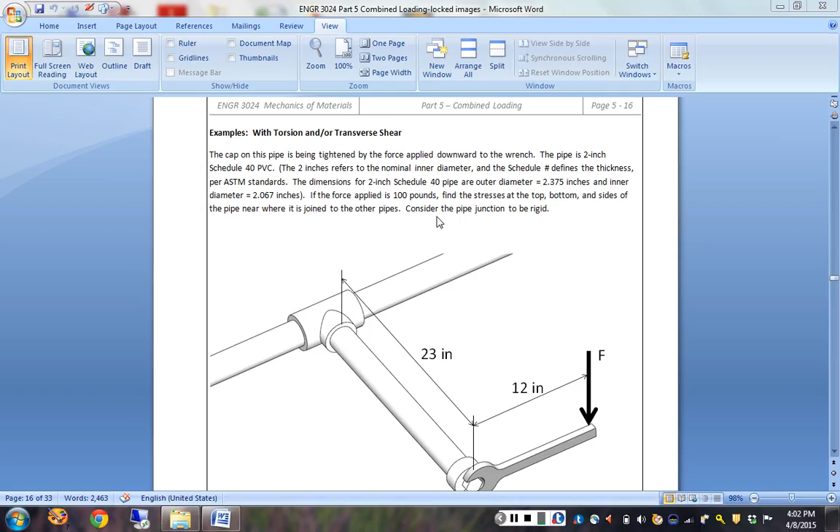And we're going to first, always, what's the first part of the process? It's a free body diagram, or we've done this enough that maybe we can kind of fast forward, but the first part really is always doing the statics problem and figuring out the reactions. Because you have to know the reactions internal to it to know what kind of stresses and what the stress magnitudes are. So, we've got some details.

We've got the cap on the pipe is being tightened by a force that's going downward on the wrench. The pipe is 2-inch PVC, which is a nominal, which actually means that it's this 2.375. Let's be purple today. So outer diameter of blah, inner diameter of blah, and it's 100 pounds down on this PVC.

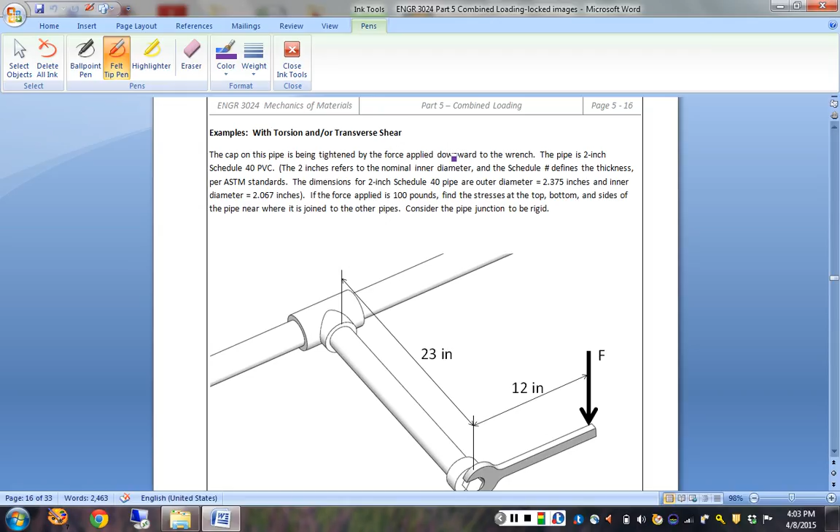Which I have always thought, gee, that's going to pop that PVC. 100 pounds is a lot for some PVC. But lest I digress.

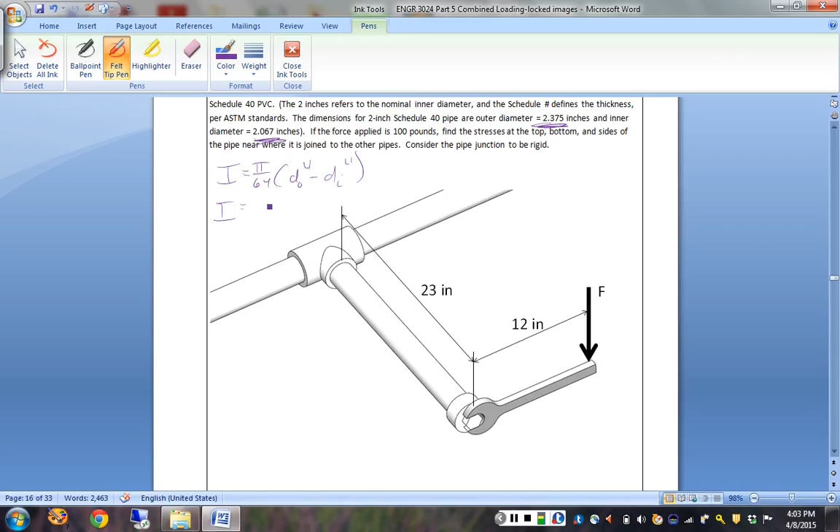So we know we're going to need some area properties with this. We are given OD and ID, and so we know we're going to be doing stresses. We know we're going to need a moment of inertia. This is one of the things that's provided on the exam, but we know that that guy is an outer minus an inner, and that's going to be 0.6657. And we have, what all is going on?

We have one force. What kind of loading does this create in this structure? What all do we have going on? Yeah, shear, because it's a straight linear force. There is a torque, which means there's what kind? It's a torsional load. So we got that. We got torsional load. We got a shear load. And that's also going to translate into bending. So we got all sorts of stuff going on just from that one force.

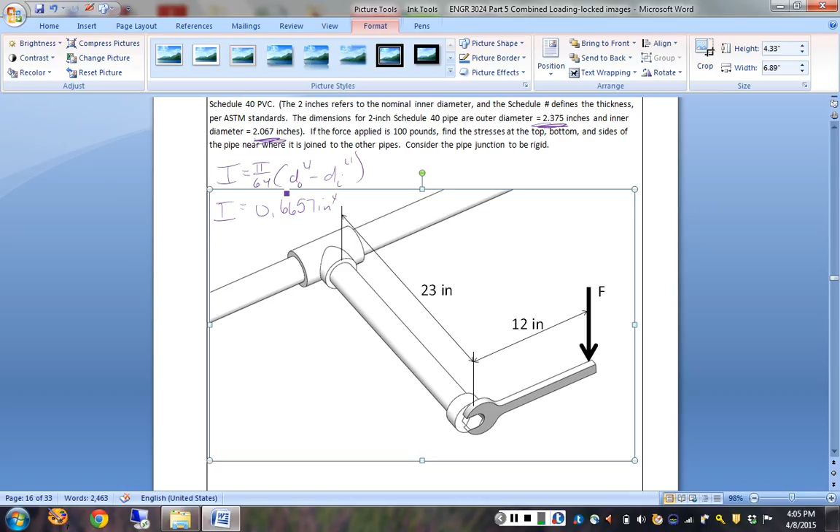So if we've got bending, we know we're going to have normal stress due to that bending moment. If we have torsion, we know we're going to have what kind of stress? Yeah, that kind. Doorknob stress? It's shear, though. Shear stress. Yeah, if you've got a torsional load. Shear, it's this shear. Right, true, exactly. It's not this shear, it's this shear, yes. But we have this vertical, so we are also going to have regular shear this way as well because of the shear linear force. So we got a lot going on.

If we look at this as if we've taken a hacksaw and we've chopped it off up here at the base connection, because this is essentially a cantilever, and you know that the worst case is going to be back at the connection point at the cantilever. So this is where I'm taking my section cut, and I'm now looking at it like that. I've taken the beam away, and I'm looking at that face at that connection point.

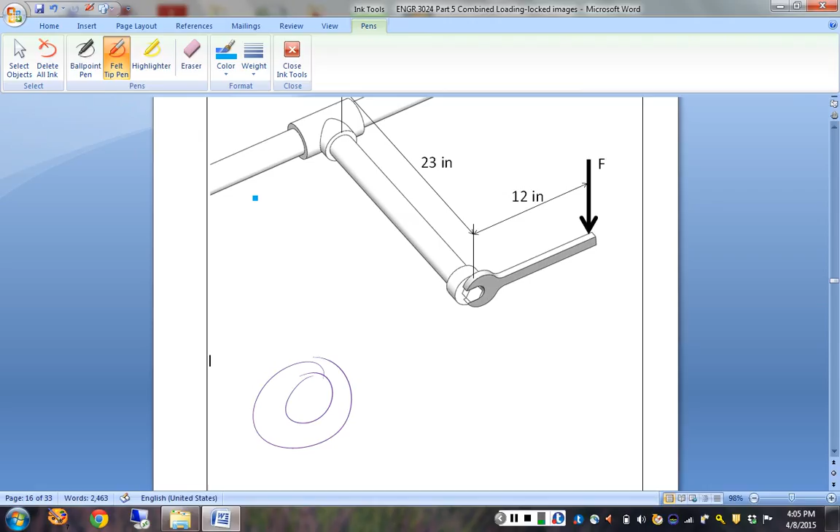So I know that I am going to have, I'll change color. I know that I have that shear force V, and that's downward, as a stress resultant back at the connection point. We also established that we're going to have bending moment downward, and that's about the axis of this other pipe. Okay? And so I can draw that one like this as a double arrow, and that's a downward. So that's my bending moment.

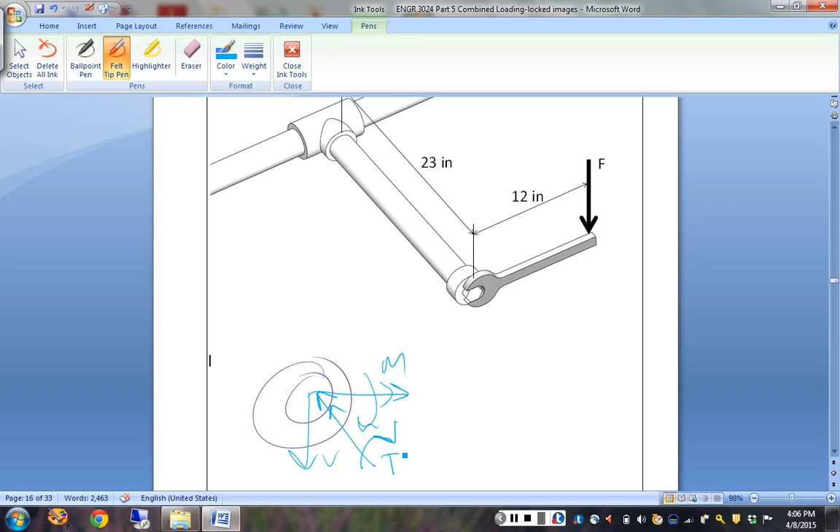And then what else do I have? What's that last one? It's a twist. It's the torsion, and that wrench is going this way. So it's a torque about this axis into the page. And I can draw that guy like that. And it's this way. And that's my torque. All right, now what are the magnitudes of those? I'm going to start with the shear because that one's easy.

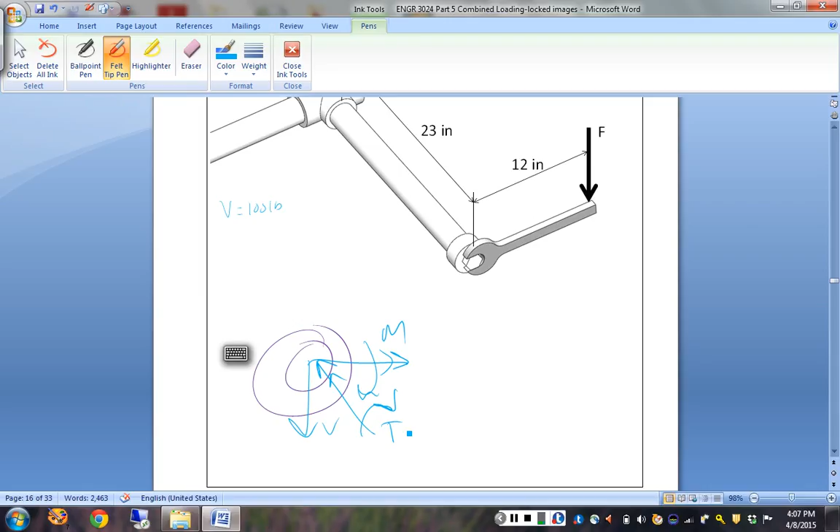It's just 100 pounds. So this guy, and I'll go over here, V equals 100 pounds. Okay, how about the magnitude of my twist? What's the moment arm for the twisting? That's the 12-inch moment arm. So how big is that torsional moment? Is 100 pounds times my 12 inches, so 1,200 inch-pounds.

And what about my bending moment? That's the 23-inch moment arm. It's the 100-pound force, but the 23-inch moment arm, so we got 2,300 inch-pounds. So those are my stress resultants back at the connection point. But we don't really care about stress resultants or the reactions.

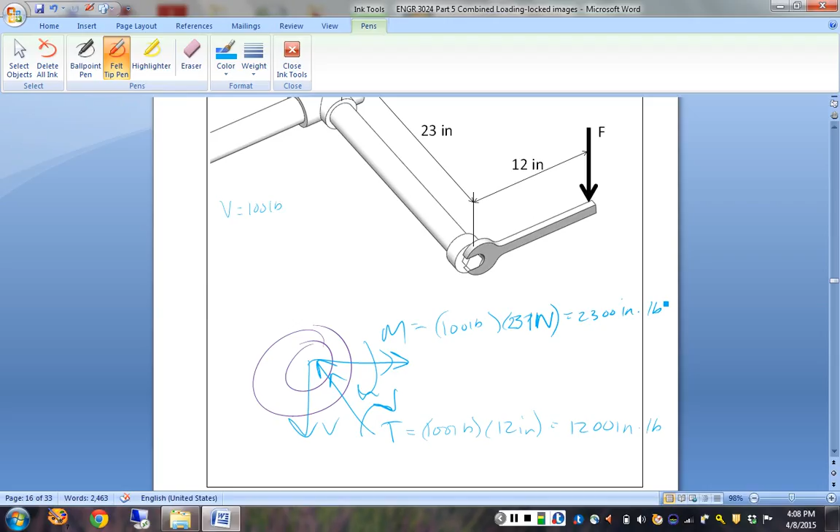We care about stresses. So if we have these things going on in a structure, what kind of stresses do they make? So let's start with bending. We got a bending moment. How do we get a stress? It's going to be negative MC over I. Yeah. We want the max case. This is symmetric, so we can just say that our max is plus or minus MC over I.

All right? What's my C? Where's my neutral axis? It's symmetric, so my neutral axis is across the middle. So C is just half the outer diameter. Okay? So we know our bending moment is 2,300. We know our C is half the outer diameter. That outer diameter was 2.375, and we'll take half of that. And that moment of inertia we figured out a second ago was 0.6657 inches to the fourth. So this guy is plus or minus 4,103 psi.

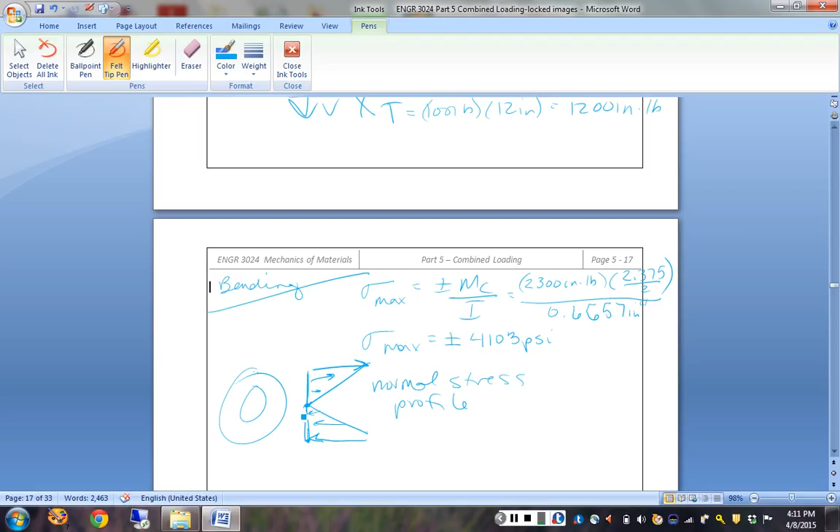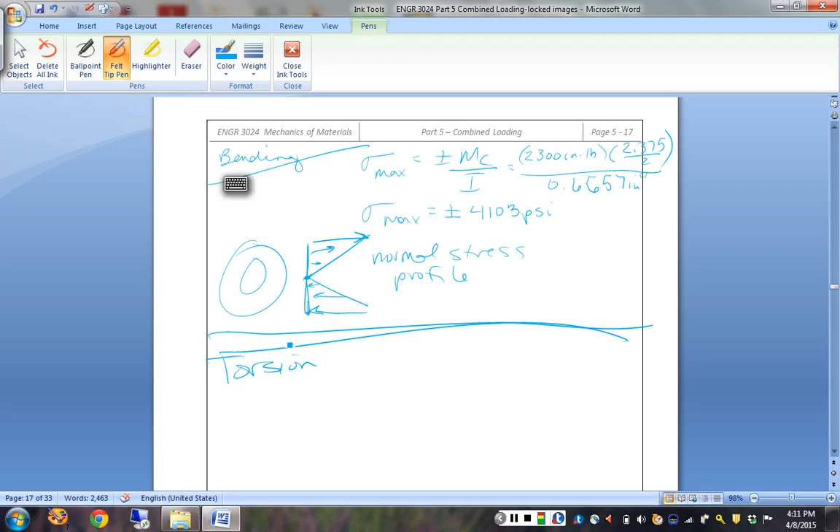We got torsion. What kind of stress, Mr. Beasley? If I twist on something, what do I get? Mm-hmm. How do I figure it out? That's the one. Okay, we figured out our I a second ago. A handy-dandy piece of trivia that I don't expect you to memorize is that J's are actually half of I's, or it's given on the back page of the test. It's pi over 32 times outer diameter to the fourth minus inner diameter to the fourth. Or 2 times I. Did I say half? It's 2 times, not half.

But what's my torque? My torque was 1,200 inch-pounds. What's my C? It's the same. It's a different quantity in that we're talking about just the distance from the center to any point on the outside because it's round, but it's the same value. So 2.375 over 2, and J is twice that, 1.3315 inches to the fourth, and that ends up being 1070 psi.

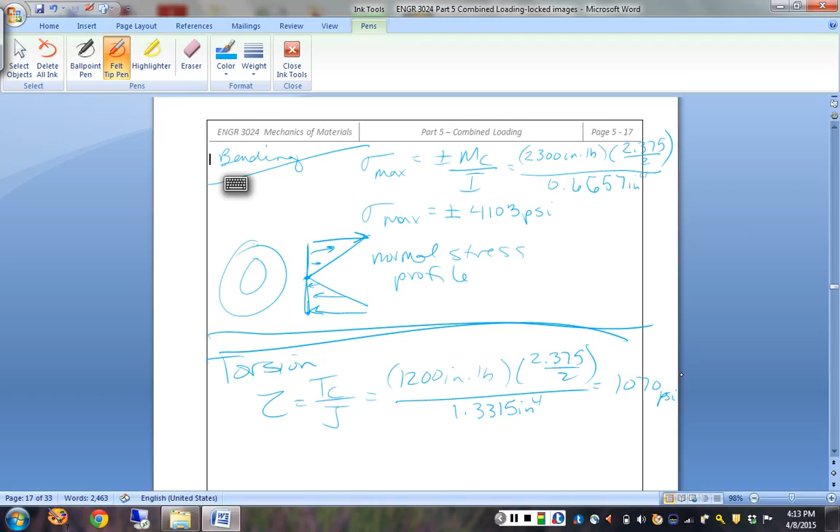All right, so what's going on all over the cross section here? Now this is on this face. The normal stress, if I take my section away, is either pointed at you or pointed into this surface. But when I twist on it, it's shear, and it's parallel to that surface. So what's my direction? How do I draw it? It's the same direction everywhere. It's just clockwise. Right. Normal stress, sigma; shear stress along the face.

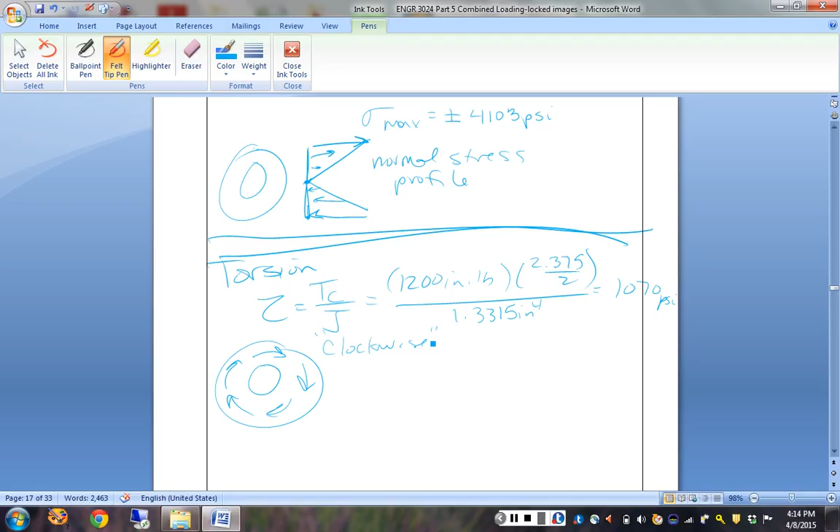So what would I say in an orthogonal sense, if I put it on a kind of global coordinate system, what's going on at noon? I've got 1070 in the plus I direction, or in the that-away direction. What do I have at 3 o'clock? 1070 down, 1070 this way, 1070 up. So you can think about it in a tangent to the circle sense. Make sense? All right. What else we got going on? Ooh, this one gets a little messy.

It's the linear shear, or we'll call it the transverse shear. It's from the V. How do we get that stress? VQ over IT. So that causes shear stress. We get it from VQ over IT. And this one is a little tricky geometrically. I don't know, I kind of like it because it makes you think about it in just a slightly different way.

Let's go back up to. Do I have another? No, I don't. Okay, I'm going to put in some more space. Insert page. Need lots of space. All right.

So if I have my whole cross-section, if I have a shear force V, where is my worst case shear stress because of it? The center, right? It's at the center. It's quadratic and it's at the neutral axis. So I know that my worst case is here along the neutral axis. How much is it at noon? 0. How much is it at 6 o'clock? 0. So I know my worst case is along this center line along the neutral axis.

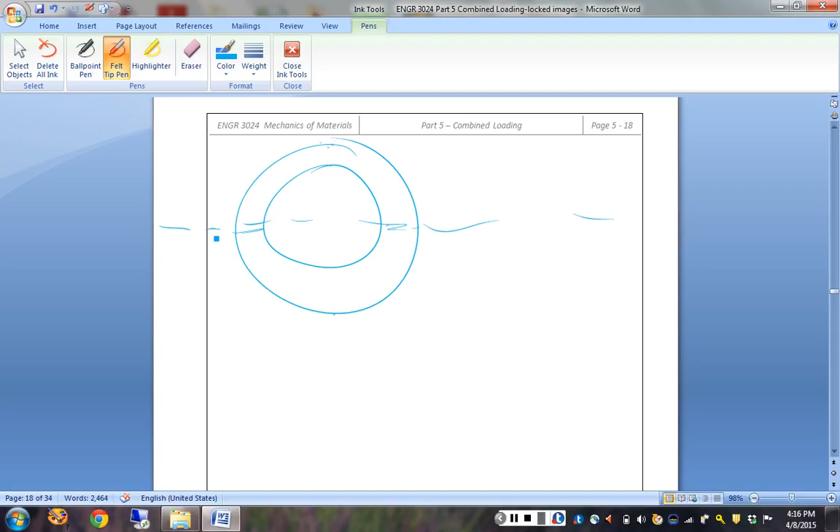Okay? Because I know that, I know where I want to make my virtual cut to do my Q calculation. It's as if you're taking a hacksaw and slicing it in half and you're shearing it at that neutral axis location. So we have tau equals VQ over IT, but we need our Q. Q is an area property like area, like moment of inertia. We can think about it in terms of the Q of the outside minus the Q of the stuff that's not there. So we can say that this is A prime y bar of the outside minus A prime y bar of the inner part.

If I just think about the areas, I need basically the area of a rainbow. And I can do that by area of a hemisphere minus area of a little hemisphere. Not a hemisphere, semicircle. We're not doing volumes. But you're with me, right? What's the area of a circle? Pi r squared, or pi over 4 diameter squared. So what's half of it? Pi over 8 OD squared and pi over 8 ID squared. Clever that. See, tricky ways to think of things.

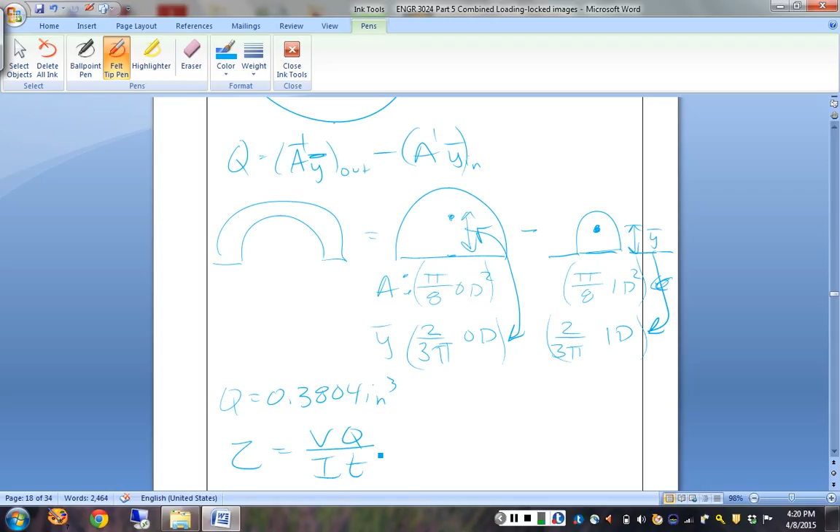Is y bar the centroid? Yes. Y bar is the centroid location of the solid shape, the centroid location of the little shape, but when you subtract this product from this product, you get the resultant Q. Q is the moment of area property that you need to go into VQ over IT. It's the thing that's sort of like area that goes into this formula. We got this guy, that's 100. We just went through all sorts of geometric gymnastics to get that guy.

To get a grasp of what Q actually is, is it like how much stuff is around the centroid? It is, I guess, in conjunction with the thickness, an indicator of the resistance to shear. Like mass is a resistance to motion. Moment of inertia I is resistance to bending. Moment of inertia J is resistance to twisting. That Q factor is an indicator of resistance to sideways shift.

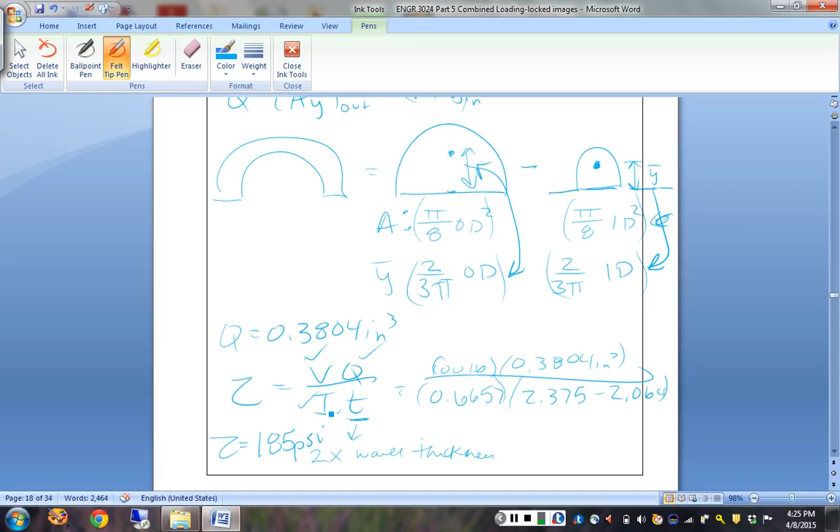Okay, I knew I was going to need lots of space. So now what does that guy look like in profile? Is that too microscopic to see? So we had clockwise for the other one. We've got compression at the bottom and tension at the top for that guy. What does this guy look like? We've already said it's 0 at the top and bottom. Tau equals 0. And it increases quadratically from here to the max here. And are they up? Are they down? Which way do they point? Do they point the same way?

Think about the shear force, the shear that we just know. Wouldn't they be going? Oh, do they go this way? It's parallel to this face, just like the torsional shear, but it's down everywhere.

Now, it is also into the plane because we are dealing with real three-dimensional stuff, and if you remember on our little cube of material, if you have a shear on one face, you have to have that corresponding shear on the other face to keep it in equilibrium, and we'll get to another drawing that maybe makes that make a little more sense shortly. But primarily, we have to think about it on this face, and it's down everywhere, and the max is at the neutral axis. So that is tau equals 185 psi in both of those locations.

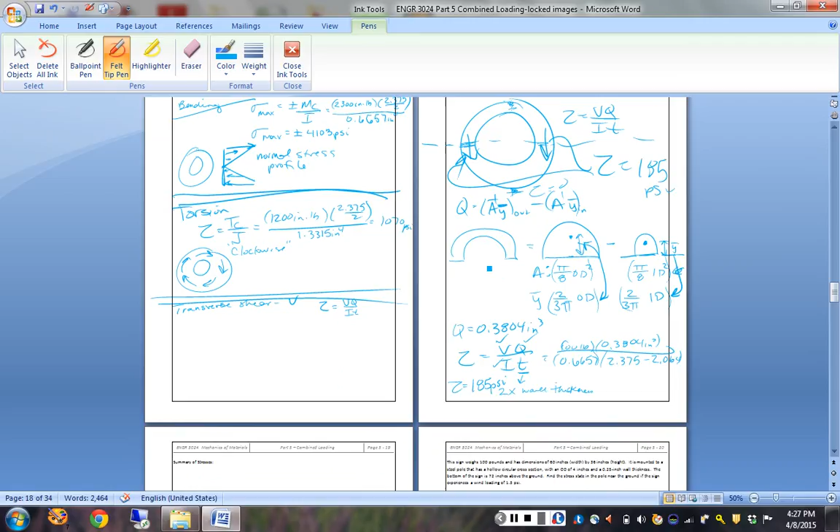Why would it be up? Like across the face. The reaction is upward, but the shear at the cut face is in the direction of the applied force. The reaction back at the pipe connection is up, but the shear force on the face is down. And it's at a maximum at the neutral axis.

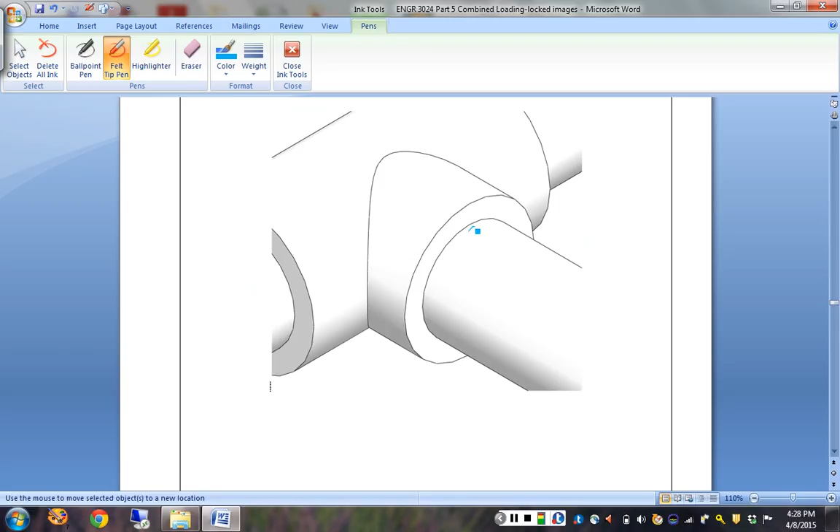Okay, so now this is a very zoomed in version of the same thing that you've got. And so essentially what I'm going to do now is summarize what's going on at 4 locations. I call it noon, 3 p.m. over there where you can't see it, 6 p.m. down there where you can't see it, and here. And I'm essentially going to take and blow up little chunks of material at each of these locations.

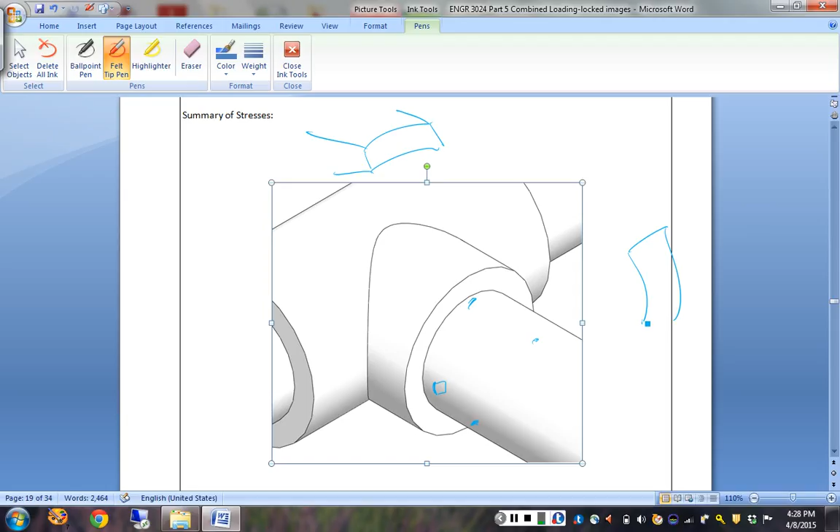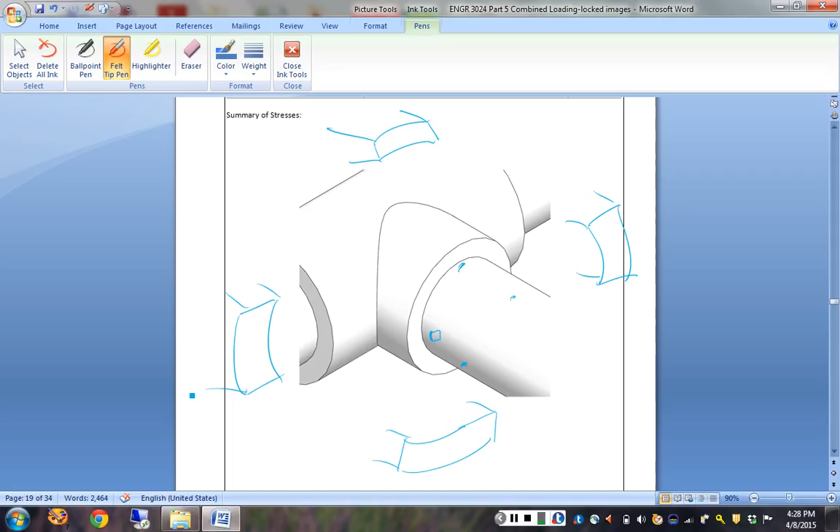And one over here looks like that. Okay, so again, that's pulling material, little squares of material out of each of these locations, and we're going to draw all of the stresses that are occurring at each of those locations, and we're going to start with bending stress, and I'm going to put the bending stress in purple.

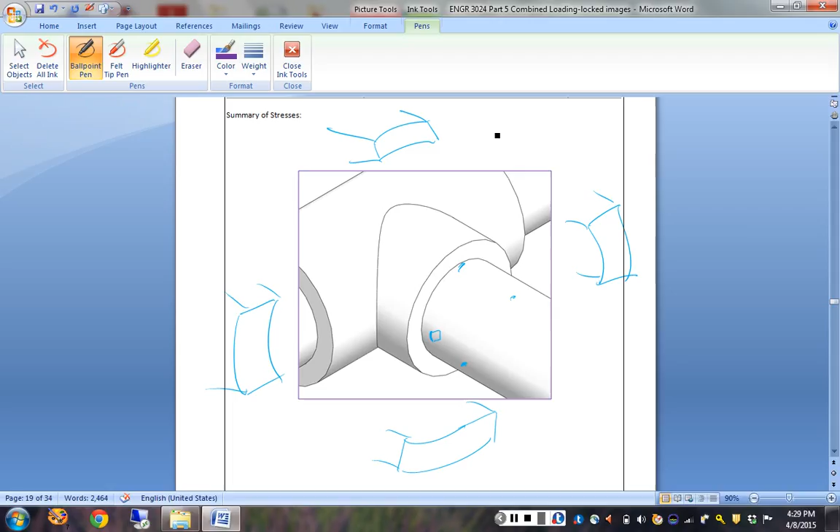In purple. Okay. If that is the surface that's flat to the wall, those arrows are going to come away from this. What do I have up here at noon? Tensile or compressive? Up at noon. Bending? Yep. We've got tensile, so it looks like that. How big was that? 4103. Okay. And that's our sigma.

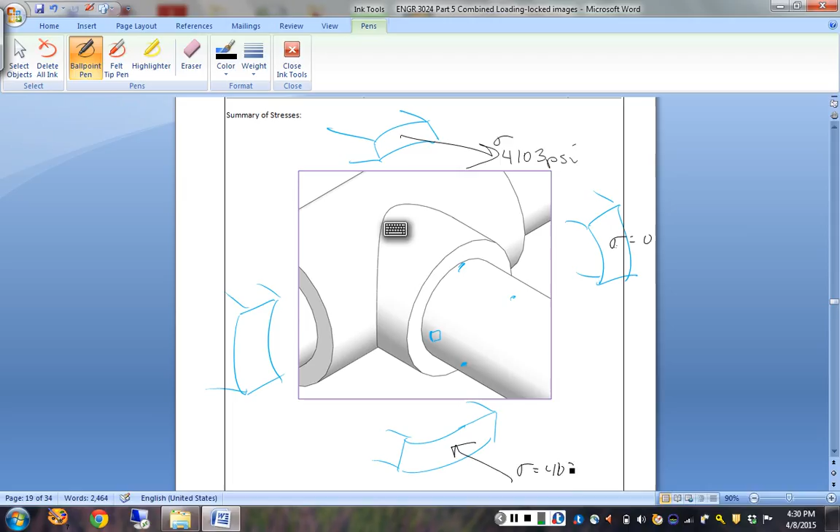How much sigma, Cassiola, do I have over here on this one? 0. Sigma equals 0. What do I got down here, Brogdon? Negative 4103. Yeah. Sigma equals negative 4103. And what do I have here, D'Agostino? Sigma equals 0. All right. Now I'm going to change color to happy blue for the torsional.

Okay. What do I have at noon for torsional? What's my value? It's 1070. And which way do I draw it? Yep, I go that way. So that is 1070 tau. But this is where also going into the other surface, you have to have that corresponding shear on the other face. Okay, how about over here? It's going to be down.

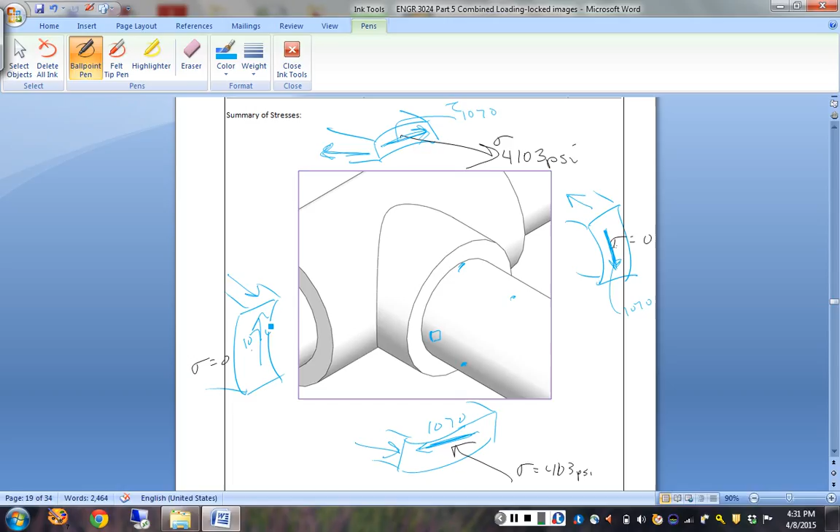6 o'clock? 1070 which way? Yeah. Oh, I forgot my other one going that way. And that. And this guy is 1070 up. Okay, who do I have left to account for? My linear shear. We'll go with green for that. How much is up here at noon? 0. So tau equals 0 for linear. How about at 6 o'clock?

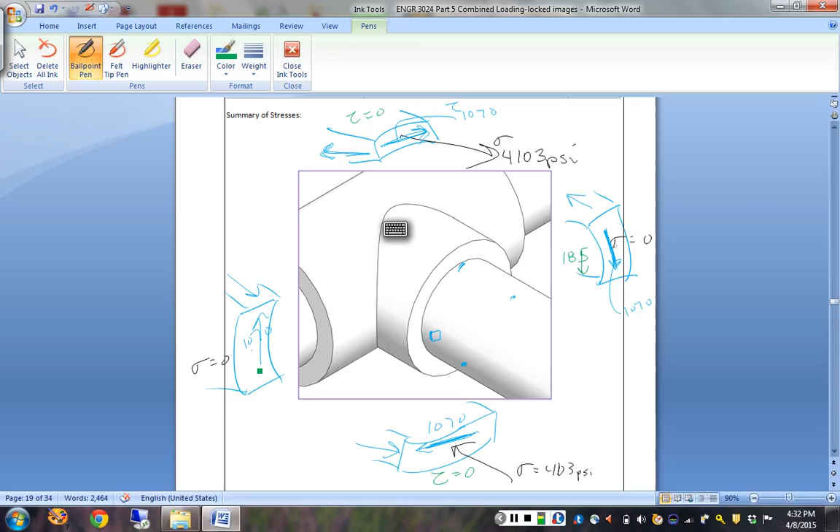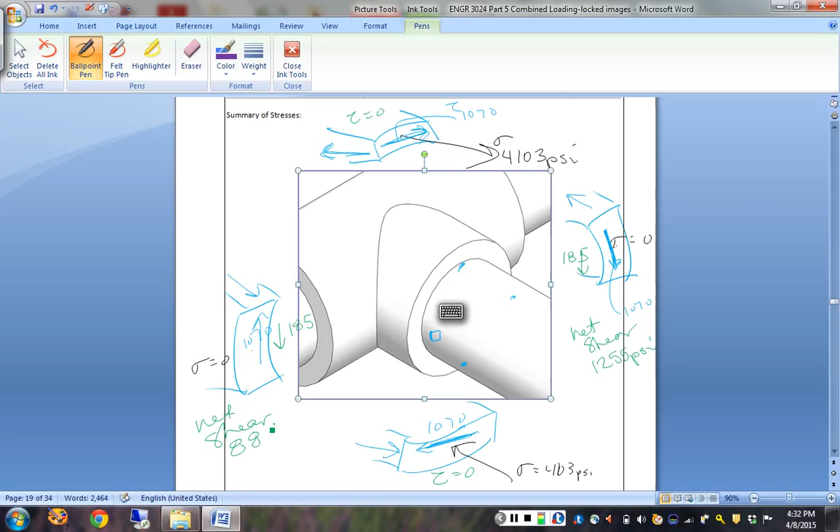All right, back here at 3 o'clock, 185 downward. And here on this other one, 185 down. So now, can I add 4103 and 1070? Absolutely not. Can I add 1070 and 185? Absolutely. So I have a net larger shear stress on this side. So net shear of 1255 over here, and a net shear of 885 over here. So my worst case stress state for shear is this one.

But what are these normal stresses? The normal stresses are 3.5 times bigger. So this is one reason that we can often ignore the contribution of a shear load, because the stress that you get from the bending moment ends up overshadowing things. Now, the next thing we're going to learn is how to account for when we have both, because we have a 1070 shear here and a 4103 normal, but we don't know how to account for that. But clearly, that has to be worse than if I had no shear and just the bending, because there's more than one thing going on. And that's the concept of principal stresses and stress transformation that we'll jump into. We may just get to start it today.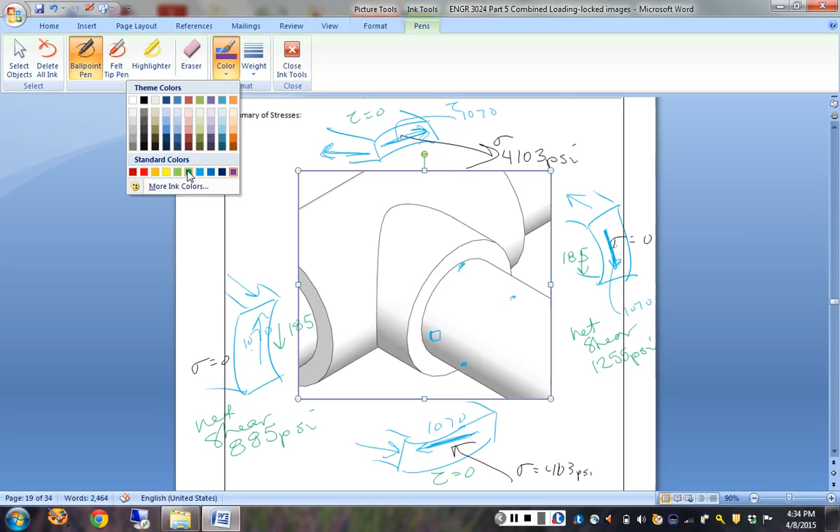So questions on that guy? Steve said that there's a corresponding shear, and that's only for torque? That you have the corresponding... on the other face? Yeah. No, I guess I should draw little green ones. Okay. Yeah, that was what I wanted to... Yes. So I was incomplete in that, yes, anytime you have a shear, you have the corresponding associated shears on the other faces. Yeah. All right.

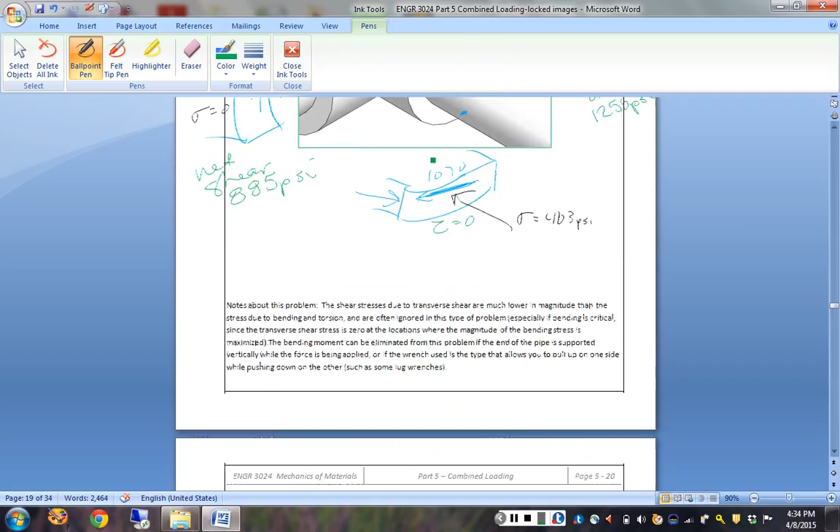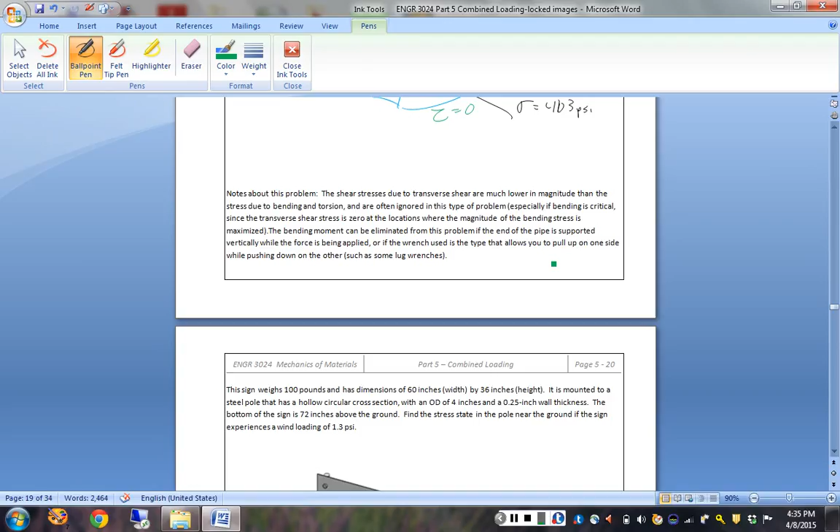ECU sign. Oh, I guess one of the notes, it is the text stuff that I often just kind of scroll past. It is useful to read that stuff. This is a note about like lug wrenches, and if you've got a single-sided wrench like that, it's putting way more load on it than if you have one of like tire irons that's like a plus. It doesn't give you that same bending load or the same stresses, because it's a couple as opposed to the unbalanced side offset force. So anyway, it's more safe for your pipe or your lug nut or whatever if you don't put the stress like that. Anyway, all right, a sign.

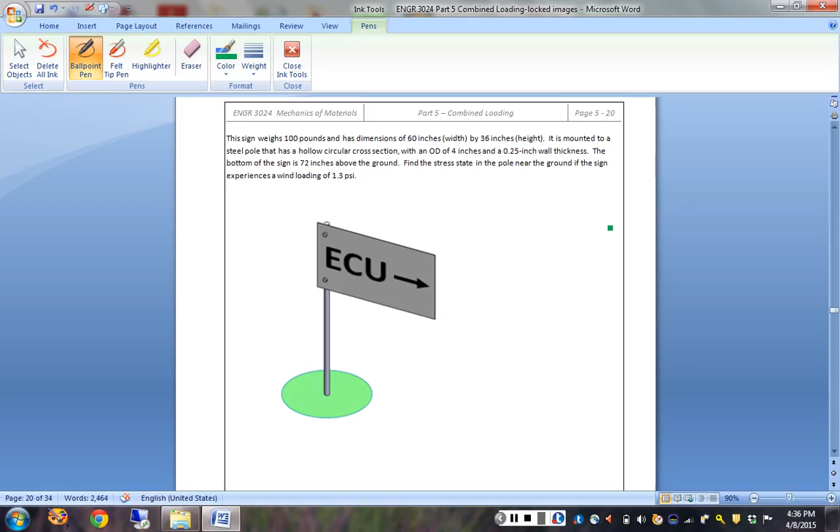We have a sign, and the sign itself weighs 100 pounds, and it's 60 inches by 36 inches, and it's on a pole. Pole is 4 inches with 1/4 inch wall thickness. This is 72 inches, and the wind is blowing at 1.3 psi. All right, what all do we need to do? I think one of the first things that we need to do is establish a coordinate system so that we know how to connect all of our math to this thing. So I'm going to say this way is X, and the wind is blowing in Y.

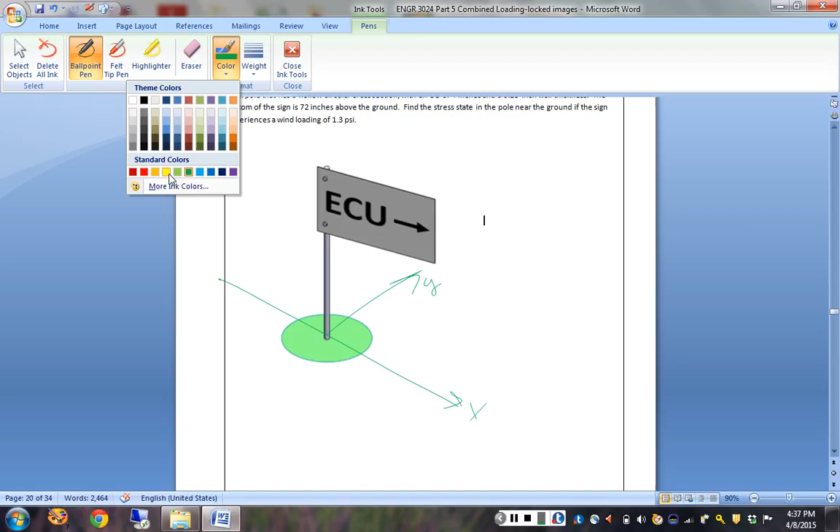Again, this is basically a cantilever beam situation where the worst case scenario is going to be at the connection point. So we need to figure out what all is going on with this situation. So I guess we'll start with, what are the forces that are going to be acting? I'll do forces in red because they're dangerous. What all's going on? The weight of the sign.

The weight of the thing, where does the weight of the thing act? Through the center of mass. We're going to assume that it's a homogeneous thing. So we have a force due to weight. And we've got the wind force. How do you convert a velocity into a force? Is it momentum? Like, what PSI would a 40-mile-an-hour wind give? Yeah, it's an ugly fluids problem, and I don't like fluids, so ask the internet.

But we already know this one is 1.3 psi. You guys know how to deal with a distributed linear load, right? 8 pounds per inch or something. Well, to do this statics problem, this is basically a planar distributed load, pounds per square inch. So we're going to do the statics problem by figuring out the resultant, multiplying by the area over which it acts to figure out the resultant force, which is also going to act through the center of mass. So this is force due to wind.

So my weight force, we are told, is 100. And my wind force is 1.3 psi times the area, and the area is 60 by 36. So 1.3 times 60 times 36 is 2808 pounds. All right. What all kind of reactions is this scenario going to make? Which way? Like that. Okay, what do we call that? Bending about Y. Okay, which force and which moment arm? Weight is the force, and what's the moment arm? Halfway. It's the location of the center of mass of the sign, so that's 30, right? So weight of the sign, and the moment arm is that far.

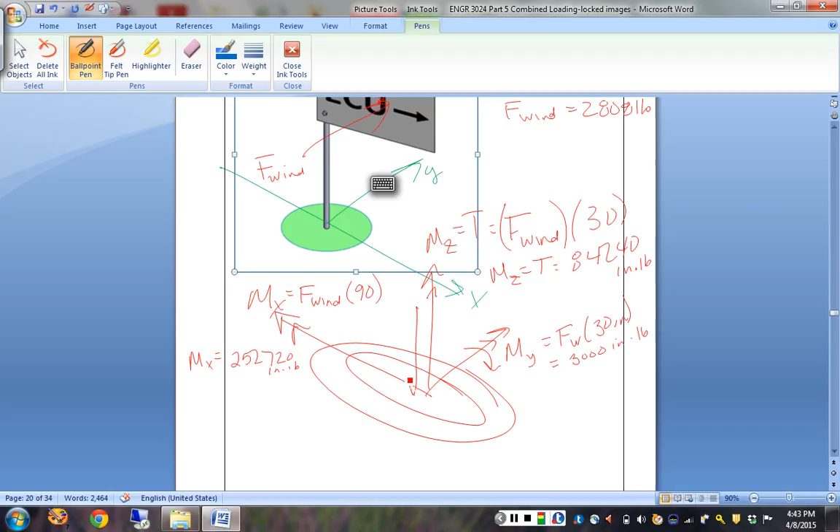Did I do the math wrong? 87? 72 plus 15? 18, okay. Yeah, it's 36 tall, not 30. So force of the wind times 90. So the moment about x is 252,720 inch-pounds. Is that it? That's 3 dimensions, but we ain't done yet. Let's go for some blue, because we have linear forces going on as well. Which way? Oh, that didn't change, bugger. Why does it do this to me? Okay, so its own weight is a linear compressive load. There are only 6 possible reactions, 3 moments and 3 linear. We got one more. What is it?

Yeah, it translates, it would want to shear off that way. So we got into static... whatever it is, indeterminate. No. So V equals the wind force, and the axial P equals the weight force. So that's everything that's going on. It is a lot. And I pity those of you who don't have multiple colors because that's just a whole lot going on. Okay.

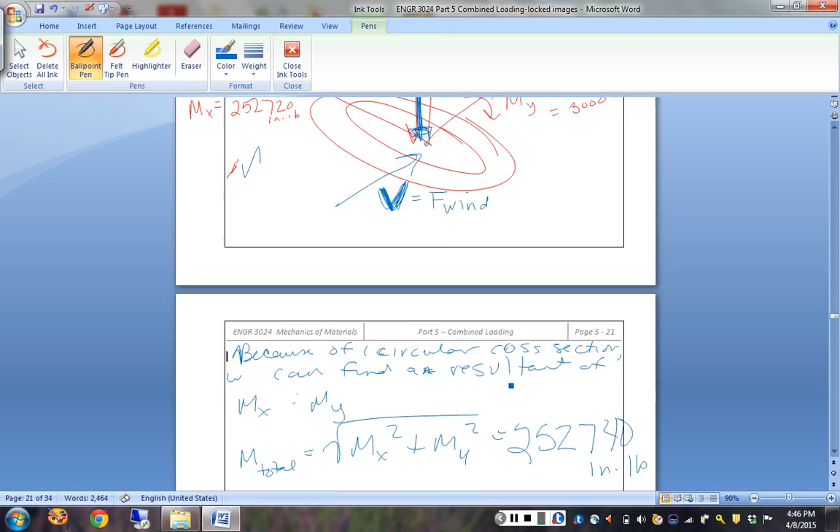So because of circular cross section, we can find a resultant of Mx and My. So M total is just the Pythagorean sum, and that ends up being 252,740 inch pounds. Did I already write that number? I wrote that number. We're good.

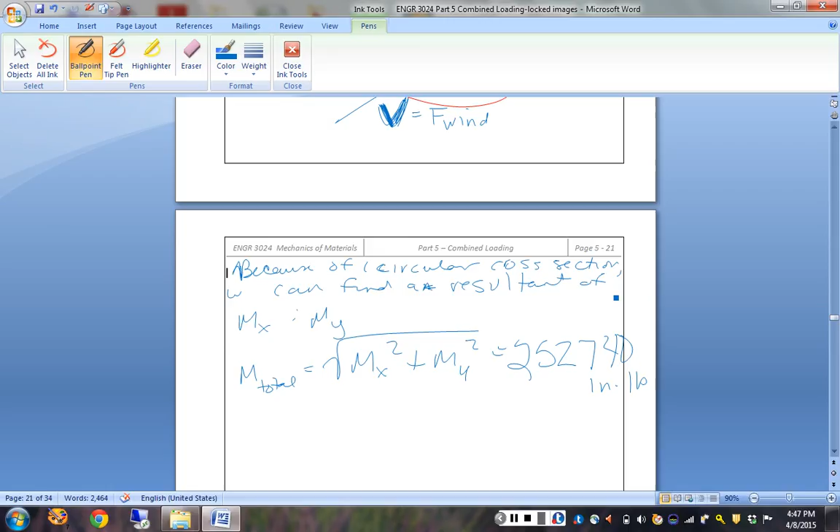Now, how is it that that works? How is it that we don't care about the direction? I'm about to explain that because of the various magnitudes. How big is this shear force? V wind, or the F wind, is how big? 2808. And how big is the axial force? This guy's only 100. Those are trivial in comparison to these other things that we've got going on. You can analyze them, you can do the math, but their contribution is going to be orders of magnitude smaller, so we can just throw it away.

If the numbers aren't small in comparison, you may not be able to, but the other thing is, no matter what, where is the maximum shear value due to the linear shear force? It's always at the neutral axis. So it's always where the normal stress is at 0. So your worst case normal stress is where you have no shear, and your worst case shear stress is where you have no normal stress. So if your normal stress magnitude is bigger, you know the shear stress is never going to be your worst case scenario. So to say that in a different way, the stress tau due to V is also ignored because it is where sigma bend equals 0.

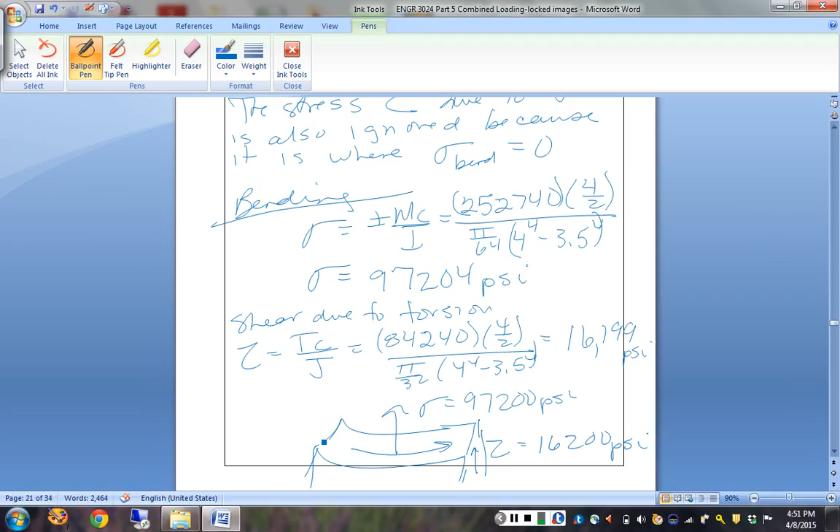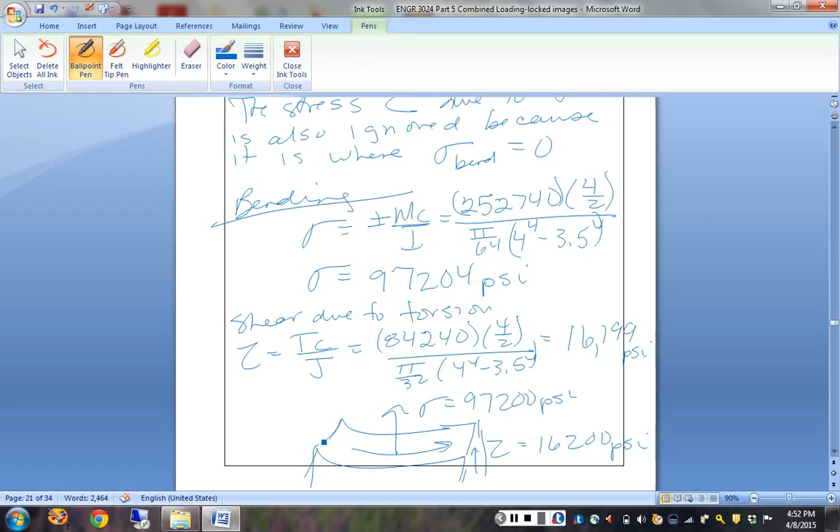Because what does my torsional profile look like? Torsion is all the way around, and this is compression on one side, tension on the other, with 0. So either this location or this location are my worst case scenario. So that's how I know, because this side and this side only have my 2 torsional shears. And with that, we will transition into figuring out how to deal with shear and normal in the same thing. So actually skipping over pressure vessels for a minute and going into part 6 next time.